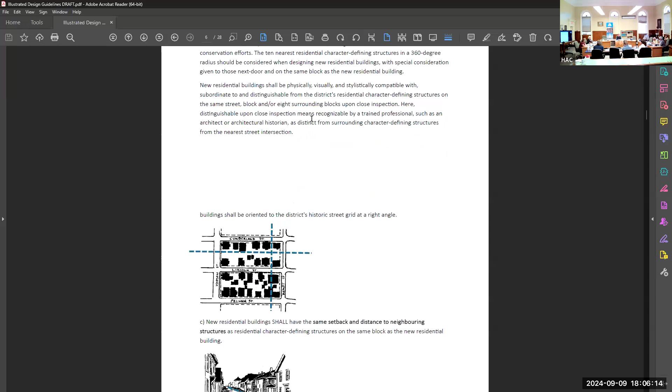Yeah, we can start there, I guess. On page 3, and I know we're talking about the illustrations, but I've used the former guide, the one that Bill Plaskett did, a fair bit. And so some things keep coming up.

So on page 3 in the second paragraph, it talks about architects. But we are not saying that you have to have an architect. It looks like we're saying that, and I know we're advising that, but we're not saying it. I've been asked that question before - do I have to have an architect? But we're not saying that.

Yeah, definitely not. And I think maybe this isn't my place to answer this question because my task was simply to illustrate the design guidelines. So this is actually pulled directly from the draft design guidelines. I can definitely look into that for clarification in terms of future amendments, but really focusing on the illustrations and not altering them.

Okay, I just thought if we are looking at this as a guideline, especially if you're using it for the workshop, for the town, it's a chance to have a go at some of that. It's a little confusing for people. I don't have a lot for wording, but that was one of them. Thank you.

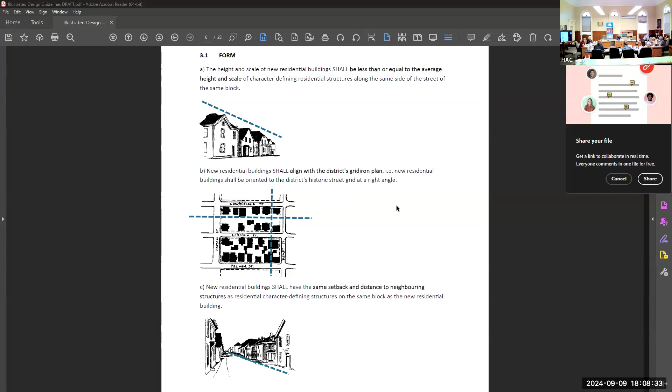I think we can jump into one of the three subsections, which is new residential buildings. On the page you were just on, Trevor, looking at the first three illustrations, we can just roll through, and if anyone has any feedback in terms of the clarity of the illustrations, the consistency through the document, and the third one being the ease of application.

Thank you. I think on that page, I found the illustration for part C, 3.1C, to be a very busy image and a bit small. The other two illustrations are simpler and the lines are more clear, but in that particular one, I think maybe making it a bit larger might make it easier to perceive.

The problem with that illustration is that the setback isn't the same - on the right-hand side of the road, the setbacks aren't all the same. Is that meant to be that we're saying it's not the same, but it ought to be the same? Basically, I think most of these pictures are lovely, but it's so busy that it's rather confusing. I think it should be possible to illustrate that one more clearly.

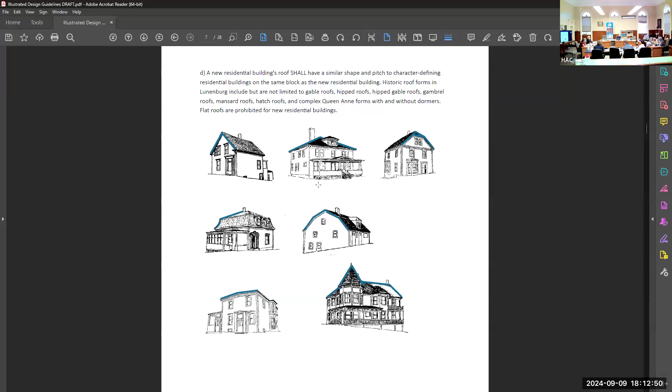I thought, since explaining roofs to a lot of people, and you have them listed there, that's all fine. But I wondered if you could take each one, like a gable end roof, and write it underneath so people could see what it actually is. For a lot of people, these documents are quite educational - they learn about their own houses when they look at it and say, oh, that's what I've got. There's enough room on the page that if they were spaced a bit, they could have that same labeling put in.

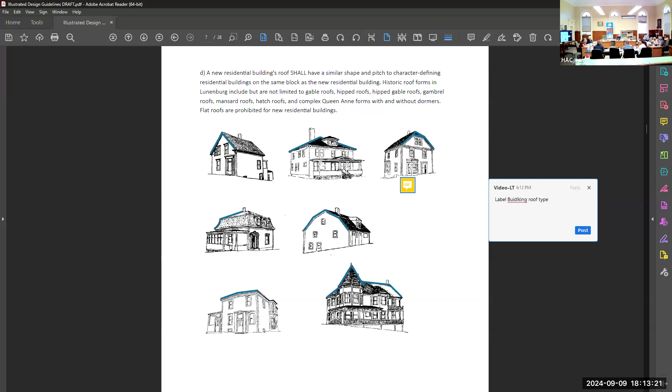Yeah, that's a great comment. Actually, Mark and I were just talking about that earlier today. I think that's a good addition, labeling under some of these images. Thank you. The same might be true for the next one - the dormers too. Perfect, if they could have the same.

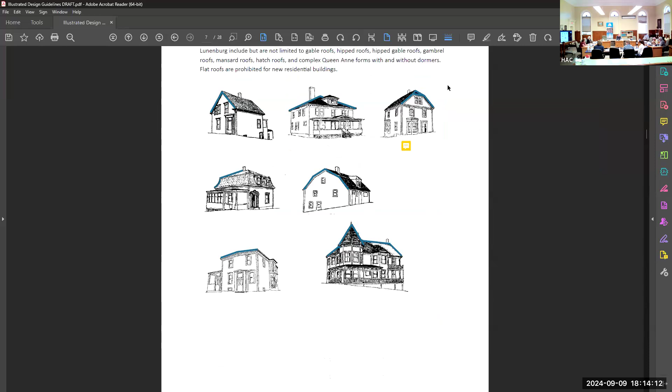I would suggest that of those roofs, the lower two do not add significantly to the point. The one on the left at the bottom, you can barely see the roof at all, and it's so nearly flat I don't think we want to encourage anybody to think that's the thing to do. The one on the right is an absolutely wonderful picture, but who on earth is going to build a building like that again? And I'm not sure that the added bit, the roof on the right of the picture that doesn't appear to have been shingled at all, isn't tying in with the rest of the roof, which is one of the things we're telling people they've got to do.

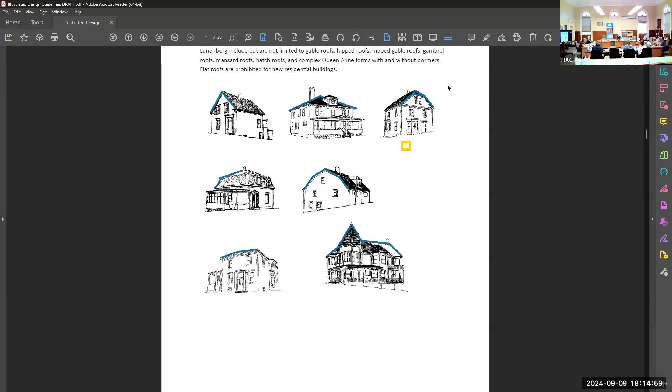So I would get rid of those two, and then you'll have space to put the extra information that Fawn wants. Thank you, Oliver, yeah I think that's valid, we could definitely discuss that. I think I included the hatch roof because there are a few examples of it, but maybe the less popular ones, like the Queen Anne, might not be worth incorporating. But yeah, definitely worth thinking on.

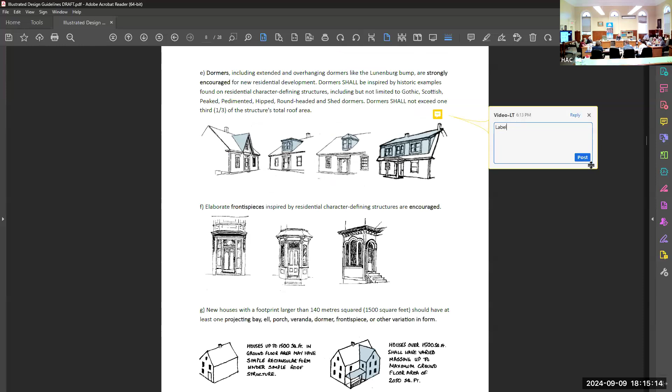Okay, with that, moving forward to this page with the dormers and the frontispieces. And I guess also starting to look at this image at the bottom where we've included a second massing.

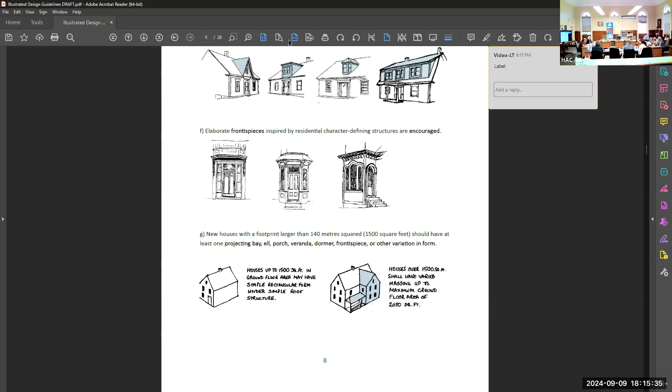Just to clarify, for the dormers in the top right-hand corner, is that a permissible dormer? It seems to be more than a third of the roof. That's a great question. I think what I'd take away from that - I know some of the images have little writing underneath that says yes or no - kind of to what Fawn was talking about in terms of labeling. It might be worthwhile having that for this. That's not a permissible one, is it?

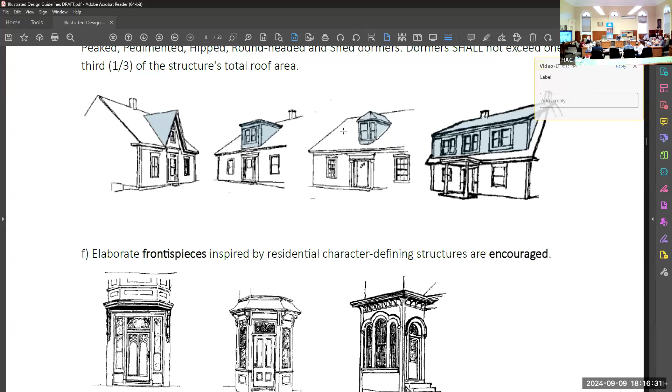Shed dormers, I think, are by and large rather ugly things, even if very practical. But there is somewhere we prohibit having bigger windows above, wider windows above narrower windows, so it's actually a bad idea to show an illustration that does what we don't allow. Okay, so maybe this illustration isn't the best example of showing a shed dormer. I think you can find slightly more modest shed dormers that would show the point. Super, okay, thank you, Oliver.

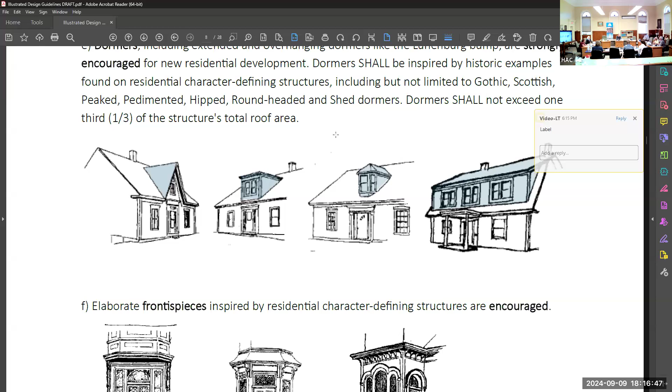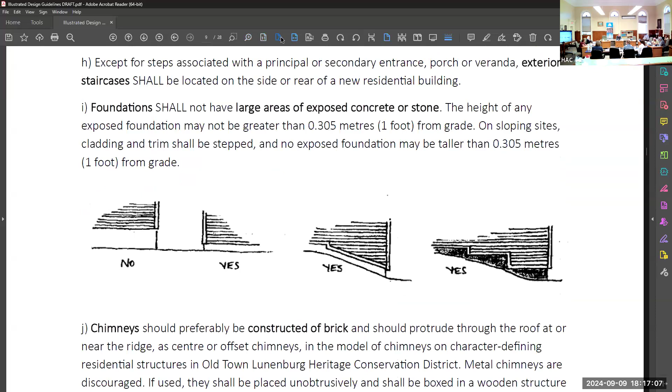Okay, moving on to the next page. I noticed there are two points on this page that have images and one that doesn't, which maybe people find totally acceptable. Anyways, that's something we can talk about - if you think we should be adding images for everything for better comprehension, or if anyone has anything to discuss about these images.

Nothing like a good visual, I always say. But for the chimneys, I was wondering, again since there's room on the page, they're very, very small.

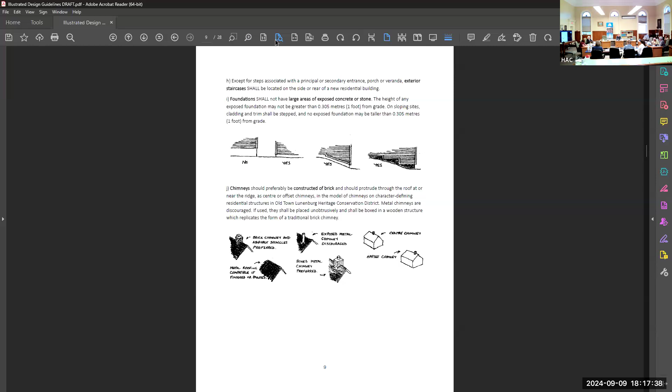Yes, can you figure it out? I'm looking at it on a small iPad, but I wondered if it could get stretched out a little bit.

Or just to keep it separated out somewhat - it's just a little crunched.

I know you also have a bit of scale, like architecture does to these things. I don't mean to mess with that, but those seem a little smaller than a lot of the rest. And chimneys are another thing that are hard for people to totally understand.

Definitely, I think that's easy to do, to increase the scale, especially because this one has a lot of wording in the handwritten portion. So that's great feedback to know that it's not quite legible - just having it a little bit bigger would be helpful.

I might comment, I think it's almost impossible structurally to build a brick chimney at the point on a roof that's shown, because you've got to have something strong enough underneath it.

And you can do that either where you've got an internal wall, or where you've got an external wall, but this looks to be about 3.5 to 4 feet in from your exterior wall.

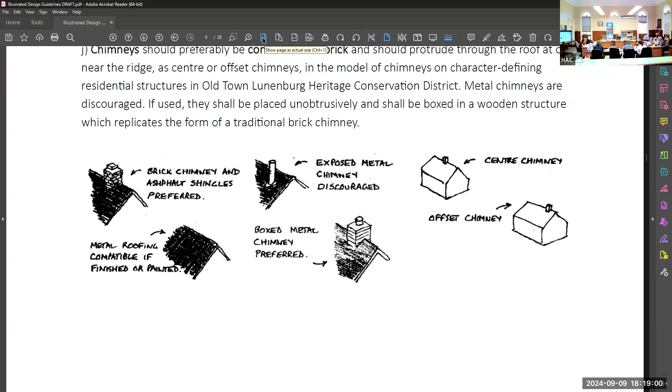So I don't think you'd normally have managed to have a brick chimney right there, because it needs to be supported by a lot of brickwork. Nobody's going to build walls 4 feet thick anymore.

In the Middle Ages, they might have had a big brick chimney there. But I agree with the basic concept, though I have to admit that a chimney in my own house looks much more like the boxed metal chimney preferred.

Because yes, it was going to be impossible to have brick all the way up from the ground.

Do you have - yes, I was just curious why there's a metal roofing image in with the chimneys. So the bylaw reads that metal chimney, or sorry, I'm just finding myself.

Metal roofing. So we can definitely remove that, because it's talking about the roofing materials rather than chimneys, and that's a good pickup that it might make it confusing for some people.

Okay, thank you. The foundation is above - really shows. That's great.

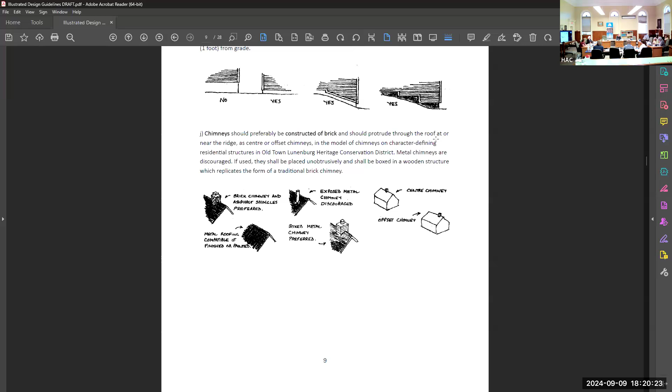All right, so with that, the next section is on principal facade design, so I would love to hear your feedback on this page.

It's on the map, but it's omitted from the list. I should have noticed this at an earlier stage, but I didn't. It needs to be on the list. I have a particular connection with the house - my wife grew up in it.

Does anyone else have anything to add when it comes to the balancing of the facade, the main entrance? Or I guess we can also look at the following page because it's also talking about facade design.

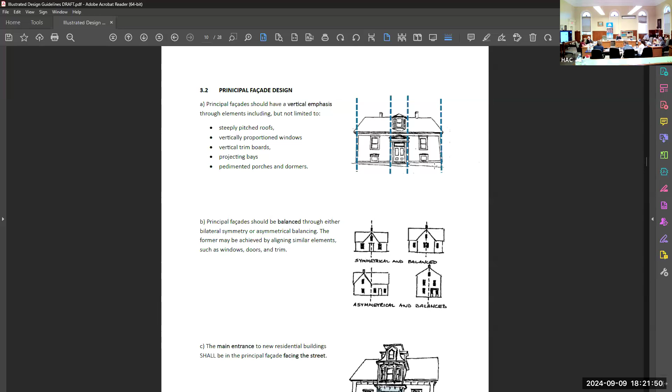Looking at frontispieces and the alignment of dormers and windows.

On page 10, where it talks about symmetry, it says it should be balanced through either bilateral symmetry or asymmetrical balancing. I get the asymmetrical balancing part, and it's tagged there.

Bilateral symmetry is not - and I'm not sure that I even know what bilateral symmetry is. Is it just a synonym for asymmetrical balancing with the 'or' word, or is it one or the other?

I can definitely look into this for you, Fawn. This is also just reiterating to me that we do want this to be a tool for homeowners.

I think it's important to include what's actually being pulled from the bylaw, just for covering what is in there for legal sake, but it would also be helpful to have plain English, as this is a tool.

So yeah, that's right - or another diagram that shows what bilateral symmetry is. I do think that the bilateral symmetry in the diagram is the symmetrical side of things.

I think it might, but you're right for the clarity of the phrasing - just for consistency across both the illustrations and the text. Yeah, for sure, that makes sense.

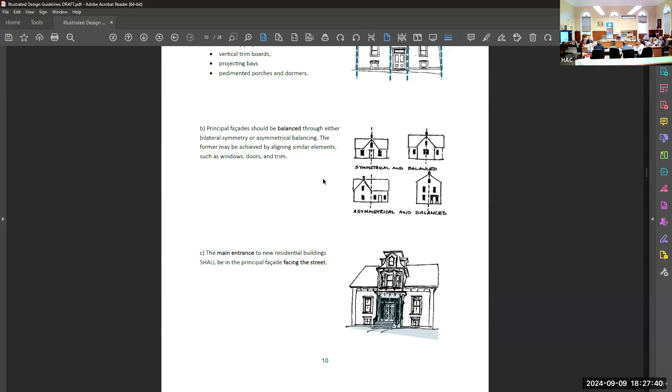Yeah, okay, I feel like that conversation could go on—in the end, that's what this committee's for. Anyways, I'd like to keep the ball rolling and see if anyone had anything to say regarding frontispieces or the alignment of dormers.

Yeah. I'm thinking, for perspective, for the frontispieces, maybe showing one on a house just to show where this belongs, in case people are having a hard time understanding that they're not just little sheds with those shapes. I don't know, just a thought on that one.

I like that. So just including an image beforehand, and then maybe having these on the side as the frontispieces. Okay, that's great. Thanks, Natalie.

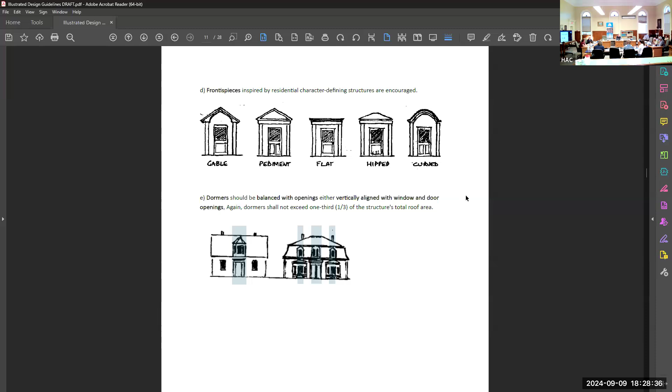All right, so page 12 looks at windows and doors. Does anyone have any notes about the illustrations for windows?

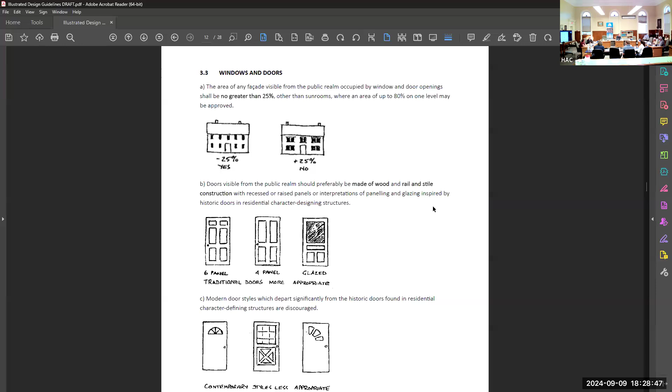I guess, yeah, we can start with windows. Doors.

Okay, we'll keep rolling to page 14. So looking at trim, oh, sorry.

I was wondering about this one below, where there's G, H, and I. If I go back to F, that's next to two illustrations. Then when you come to G, H, and I, the pictures are down where we're talking about skylights, whereas I think those go with H. But there really should be drawings for G and H, so I'm not sure how you'd do that without messing up the format. The pictures aren't beside the correct item.

Definitely, so just massaging around the formatting for this to make it a little clearer, kind of more like page 12, where it's pretty simple - we've got a point and then a drawing right underneath it, so it's very clear which drawing is associated with which. Okay, definitely, that's good.

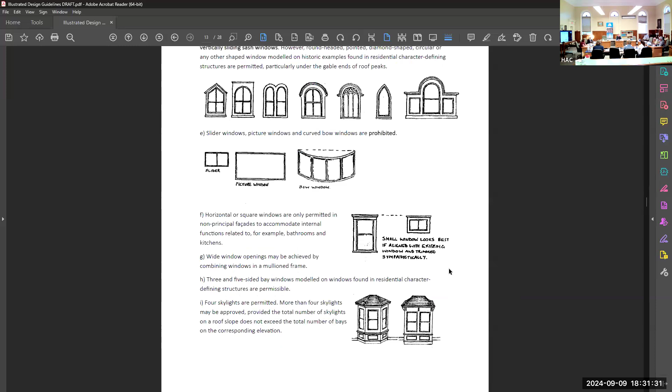Or if you feel you don't need illustrations for certain points that aren't illustrated, what's the general feeling? I think illustrations overall would be best - visual is always a great resource when all else fails. Thank you, that's great.

I was going to say, I think it's important because you're introducing words that aren't common, like mullioned - most people don't know what that word means. So a mullion frame is even more difficult. They wouldn't necessarily know the bay window goes with that picture, except that it's beside the skylights. But yeah, especially when there's uncommon lingo used, it's good to have illustrations.

I can definitely look into either adding more Plaskett drawings, or maybe look at adding some photographs or renderings, things like that - just simple renderings. Okay, that's good feedback, thank you.

I think it's good that you've got the little drawing of the bow window, because many people won't understand the difference between bow window and bay window. Given that one is encouraged and the other is forbidden, it's quite important that people know the difference. Super, thank you Oliver, that's great.

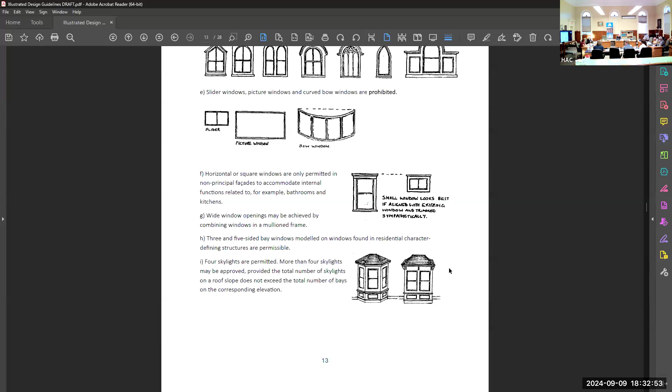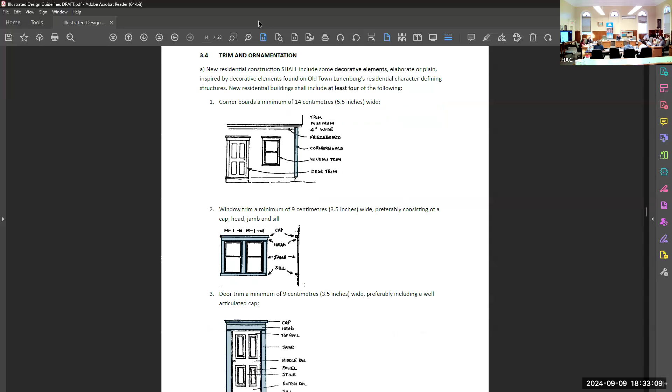Okay, how's everyone feeling about windows? Okay, so the next section is a bit heavier. Basically, this section is looking at prescribing people to include at least 4 of the following elements. So if anyone has notes on these, go ahead and open up the floor.

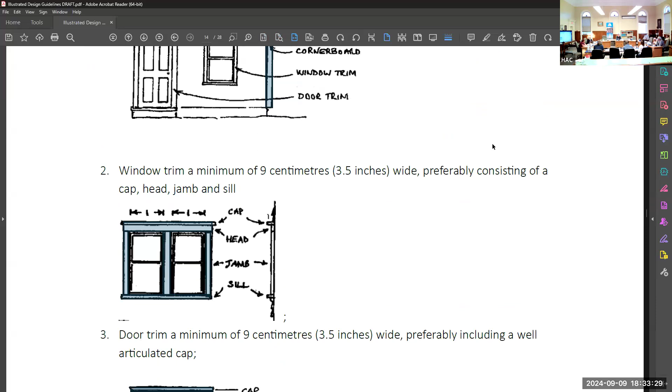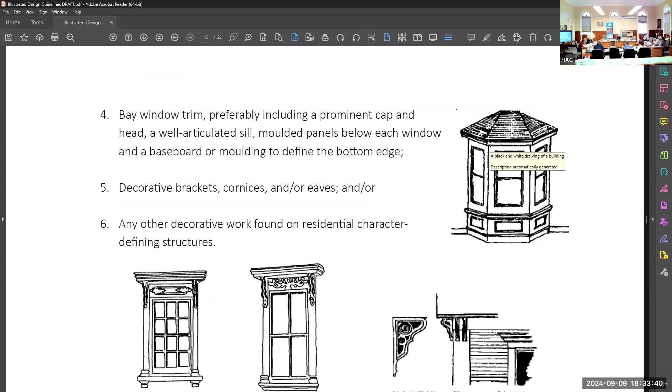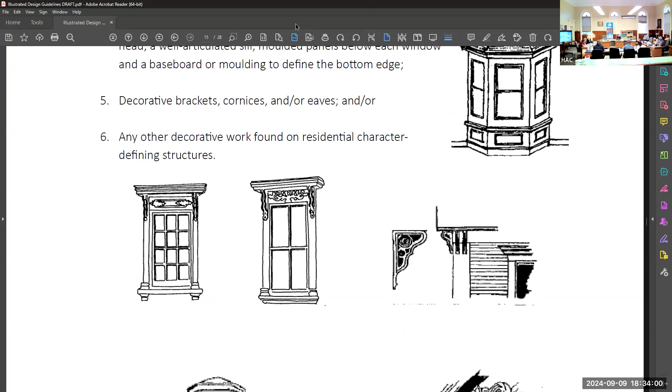I guess for clarity - I'm on the next page now, sorry, I don't have anything for page 14, but I'm thinking with number 5, decorative brackets, cornices, and/or eaves, and/or - I'm just noticing that now. And just to clarify, it's at least 4 of the following, and that's all the way down to 8.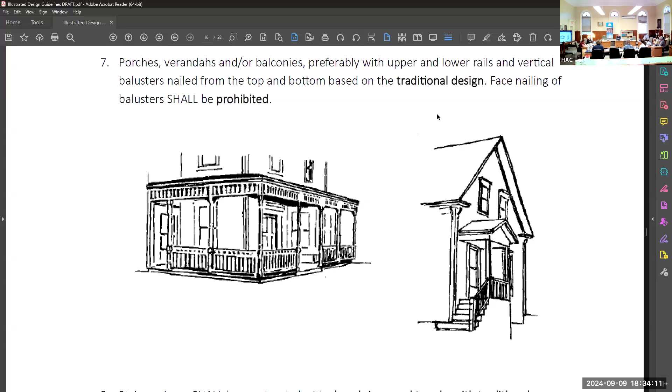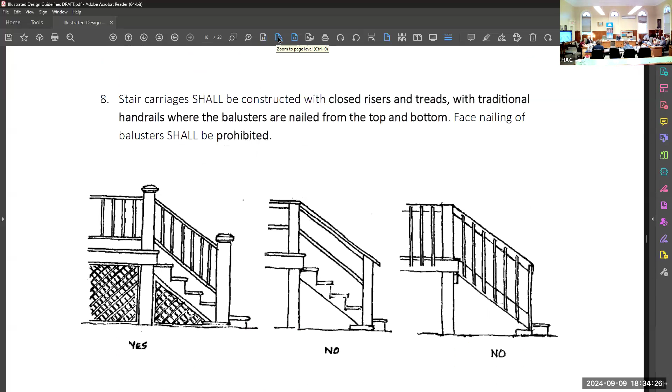I think sketches would help clarify some of the language, and then some labeling. I guess there's already some between that and some labeling with the sketches. That would be good - yeah, that's great. And I was thinking about this this afternoon.

This number 8 is kind of heavy on the illustrations, so labeling, I think, would be very helpful in this instance. Thanks, Natalie.

Number 2, with the window trim - I'm not quite sure of the purpose, other than how architects draw things, of the arrows above the window without any explanation. Not sure what those do. Yep, we can take those out.

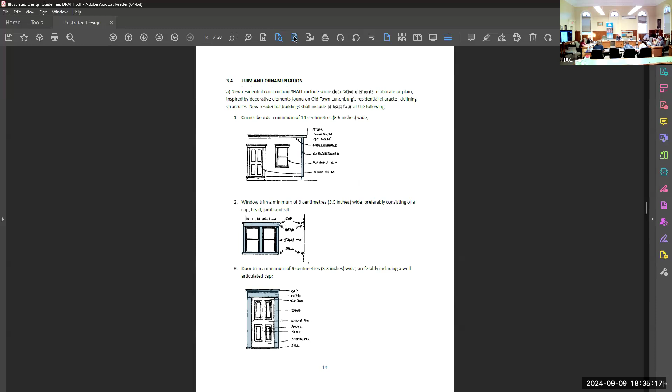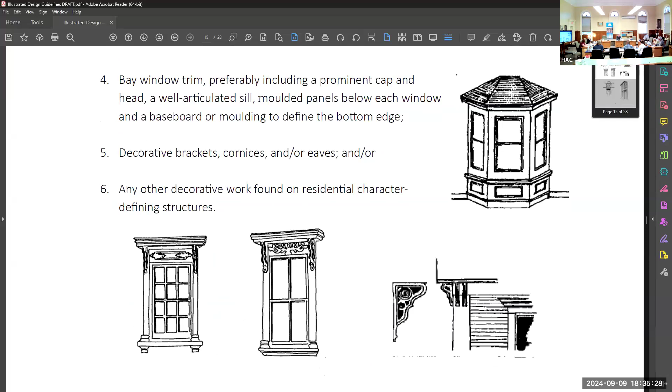Okay, no problem. And on page 15, I had a note to maybe combine number 5 and 6, and then indicate underneath the drawings what they are. And one thing I found missing - it's just one word, but I'm putting in a little plug for the word 'corbel.' It is a bracket, but I looked up the difference between a corbel and a bracket, and the only difference really is that a corbel is thicker than a bracket. However, you hear that word a lot.

People keep asking what these things are anyway. They're kind of different from a bracket, even though they have a bit of structural integrity. I thought, oh no, you can't combine them. But anyway, it would help if some of them were labeled, like a cornice versus a bracket versus a corbel, elements of trim, because we in Lunenburg have a lot of unique kinds of trim.

Yeah, I think that's a great idea, also because this is a tool for homeowners, that's who it's targeted at. So in terms of understanding more about your home and what makes up the facade, I think that's terrific towards the understanding of it. Super.

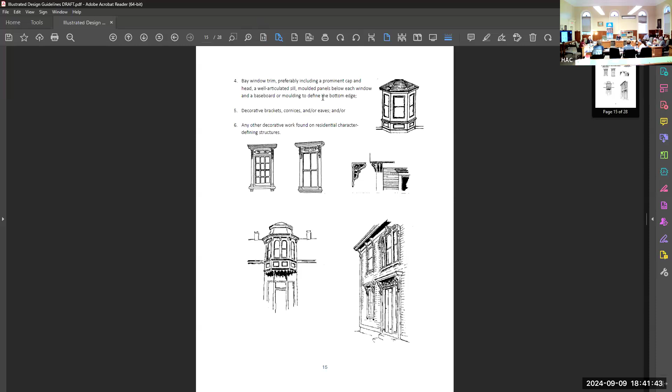Okay, I think from there I might roll into materials if everyone feels okay with that. All right, so page 17.

This one has less illustrations, but I'm going to point out off the bat that we had already discussed maybe establishing illustrations for all of the points, which would be appreciated. But if someone wants to tell me otherwise, go for it.

Yes, and actually I missed it on the top one, but it's in this one, and it's just a small one - a lot of people in modern day don't know what a baluster and a balustrade is. That's actually a bit of a thing when you're doing it. And I know here it says it shall be wooden.

If you look at some photographs of some of the homes here in town in the past, there are some that had, and I think some still do - like a cast iron, not wrought iron, they were white metal I think. That was fairly common for trims around like a top of a sunroom, or they'd use the baluster to make a balustrade around an upper deck or a widow's walk or something like that.

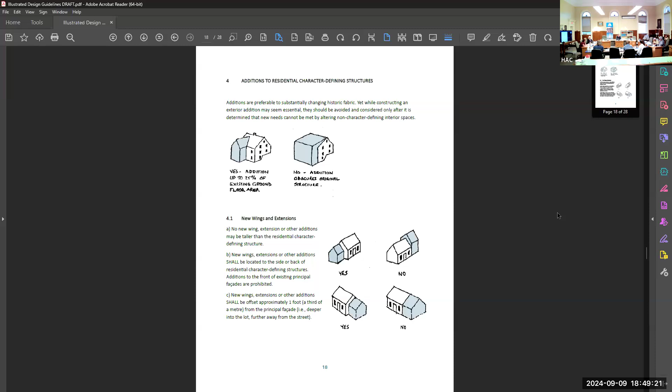All right, I'm just going through to page 20, 21. These are a bit text heavy in my opinion, but I'd like to hear from you and what you think. It's not in context of the text, there's a lot. I think it would be hard to put details in all of those, but on page 20, at the bottom, again on the dormers...

My understanding of reading it and looking at the sketches is that the top two are permitted and the bottom two would not be, but I could be wrong on that. Making it clear what's a yay and what's a nay is important, because that is not clear at all in those ones. Even perhaps an X next to the non-permitted ones would speak volumes more, because if someone's just flipping through and seeing a picture there, they might think, oh, I can do that.

Yes, that's a good point. The one on the bottom right-hand corner really shouldn't be permitted. We might just about allow the one beside it. That's great feedback in terms of clarification for the illustrations. In terms of the illustrations on the following page, is that good?

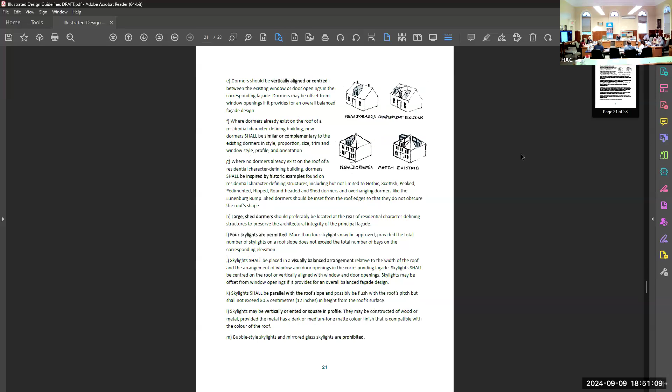Good stuff. Okay, looking at the two following pages, 22 and 23, in terms of new doors and windows, does anyone have any feedback? Yeah, let's see what I have here.

At the top there is a yes and no, before and after, and then there's a set of windows with shutters, which go with— was it G? Yes, it's G. So again, it's hard — when you first look at that, you think, what are they trying to really say? It looked like one of those games of what's missing in the picture, like there's one shutter missing on one. So is it that the addition of shutters without historical evidence of their prior existence is prohibited? Is that what goes with that? Or am I wrong? What does that go with, that collection of four?

Yeah, that's correct, Fauna. I think this is speaking to the same point you brought up earlier. Some of the pages are formatted with the associated drawings directly underneath, and that seems to be the right way to go, just in terms of clarity and better understanding for people. So I can definitely adjust the layout to make it more digestible.

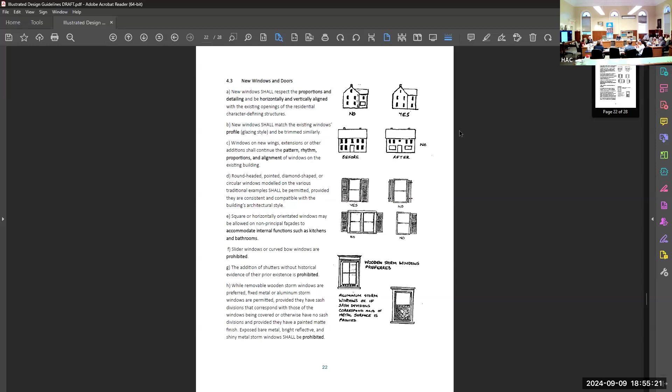But this section, if you flip back, is on additions. So we're really talking about - picture it, you've got your house and now you've built your addition, maybe on the side of your building. You're assuming your house has a primary entrance. So basically what we're saying here is new doors, a secondary door - that door we don't want to be visible from the public. So for example, putting it maybe on the side would be a better and more encouraged option.

But again, this is permissive language, it's 'should', so we can encourage it from a heritage standpoint, but we can't prescribe it. So if you wanted to put your door on the front, you could, but it would be encouraged not to. That's really just, from my understanding, from a heritage standpoint, to keep the primary focus on the primary entrance. So it's really about new secondary doors - that's right, yes, is how it should be.

Right, so there is a thing about the secondary door confusion with new doors versus - because then on number K, new doors shall be. So again, we replaced our door when we were on Lincoln Street with a new door, but it was the principal primary entrance at the front. So when I think of a new door, I think it was brand new to us, you know? So just that separation of what is actually a new door, literally a new door that you purchase, versus a new addition to the house.

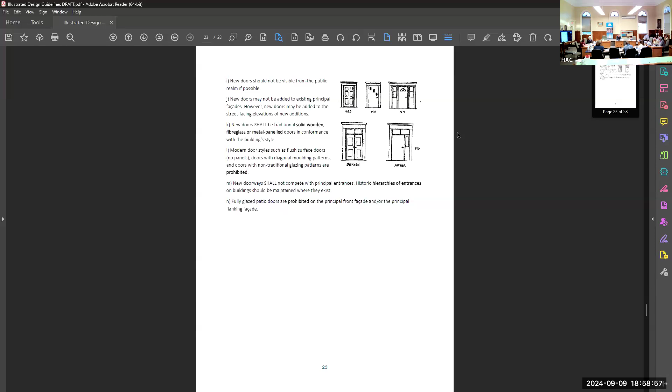I've got a little bit of a question about the pictures. First of all, I'm not sure what the words 'before' and 'after' add to this pair below. I see what you mean, but you're saying if you want to replace your nice Victorian double doors, don't do it with that on the right. But I've also got a question about the picture on the right of the upper row.

You are obviously saying no to the door, but unfortunately it seems you're rather implying that side lights are also unacceptable, which I don't think you're wishing to imply, because there are plenty of good examples of that being quite acceptable. So maybe just clarification on what this image is illustrating, and the style of door - it comes across as saying don't put sidelights.

Then definitely we can just clarify. And I think that comes down to labeling again, and clarifying on that.

I feel like these images belong to what are acceptable replacement doors rather than new doors for entry - new doors for new entryways. Because you're seeing this is what it used to look like and this is what it looks like now, and we like this, but we didn't like that.

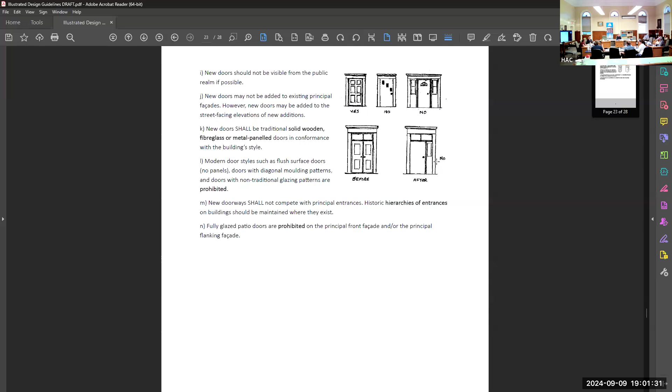I guess I'm a little confused, and I just wanted to clarify that this is for new residential infill. This is what we're looking at. We're not talking about renovations to existing houses. We're not talking about modifying existing buildings. And so I think there's a number of things in here that if we went through in detail would be completely omitted. The before sections of all of these things don't really make sense for a new building that's being proposed, unless I'm mistaken.

So when we see a lot of these diagrams that are super confusing to the public and people who are going to be trying to apply to build something new, to see a before and after, and there is no before, right? So I think we have to sort of refer them back to what the items are that we're looking to try to achieve and try to make it less confusing, if that makes sense.

Actually, I think we're doing both, aren't we? Isn't that the whole point? That we're both giving advice about alterations, stroke maintenance kind of thing to existing buildings, and guidelines for new, and that's part of what's difficult - it's one collection of instructions and pictures for a number of different situations. But I still think that's a fair thing to do.

But I would entirely agree that before and after are unfortunate words to include, because in most cases there won't be a before. But the same principle applies - if you're needing to replace your rotten Victorian door, you've got to still replace it with the right kind of style, and not have a door which might be fine out in Newtown, but won't be any good in Old Town. Right, thank you, perfect, Oliver.

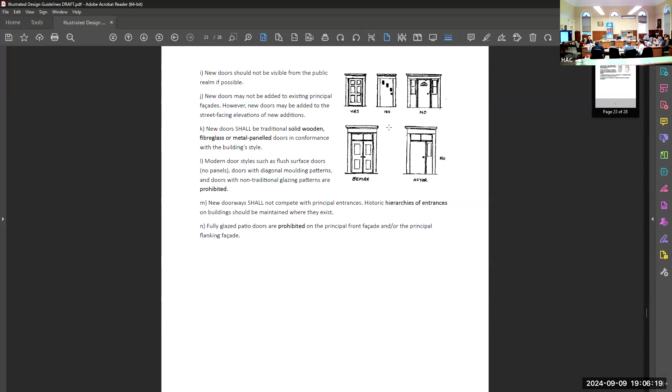With that being said, there is one last point before we get into alterations, and that's new decks, porches, verandas, balconies, ramps, and stairs on page 24. If no one has anything to say, then we can jump into alterations.

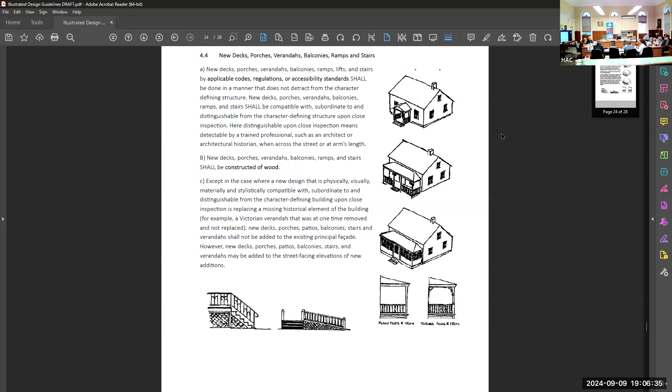Yeah, Trevor, if you want to scroll down to page 26. So this is the small, but again, to Fawn's point about it all being infill, all of this ties back to infill, contributing to housing, whether that's a new project, a new development, an addition to your building, or an alteration you're making to your house to increase housing. So I'd love to open up the floor again to look at the illustrations for alterations.

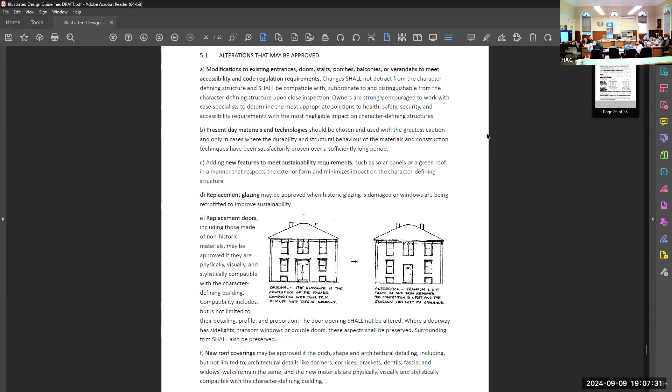I'm not quite sure what kind of image you would use to help explain on page 27. I'm not quite sure how, so alterations prohibited, this would be to existing.

Illustration letter A, where no attempt should be made to correct deflections that have occurred over time. I know what I might define deflections as, but I'm not quite sure what they mean there or how you would show it. Changes over time should be appreciated and understood as essential aspects of vernacular architecture. Extensive restoration is prohibited. By restoration, it's almost like renovation more, but can you explain sort of both of those? I don't even know if you can put a drawing to explain them.

Yeah, I think definitely both of those I would tie back into the standards and guidelines in terms of being distinguishable. You don't essentially want to alter things that have been put in place over time that have now become character-defining elements. So I think I would have to do a bit more research and come back to you, Fawn, on those two points, and why those decisions were made to include them in the bylaw.

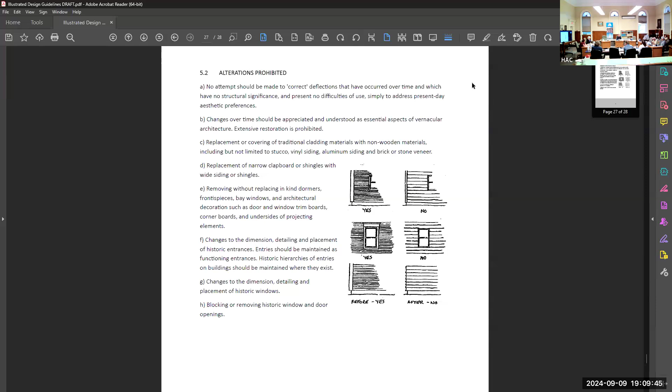On page 26, I'm presuming that the picture on the right is meant to indicate what not to do, but it's not made very clear that that's the purpose of the picture, or at least I hope that's the purpose, because the whole character of the house has been destroyed.

Okay, super. So again, clarity on the illustration in terms of yes or no. We can do that. It directly contravenes the writing that's to the side of it, because it says you must retain the transom and all of that.

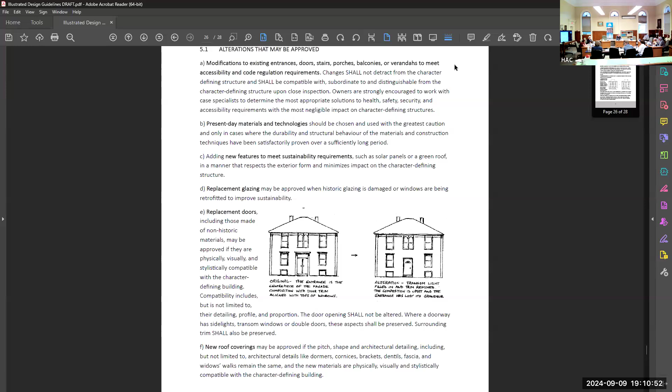No, exactly, you definitely understood the illustration, but it would be good to have those marked clearly. I think it needs the word NO somewhere there, or a big X. Okay, super. Does anyone else have any comments or things to add for these pages? If not, I will roll right over into our last section, which is outbuildings.

Okay, do you have anything? No, okay, I read it. So that's the entire document. I think, yeah, there's a few takeaways.

The main ones being just the layout of the images. It was clear to me that most people liked having them directly under the point we're talking about, just for clarity's sake. So keeping that layout consistent through the whole document would be good. Also adding some clarification wording with or alongside some of these illustrations would be good.

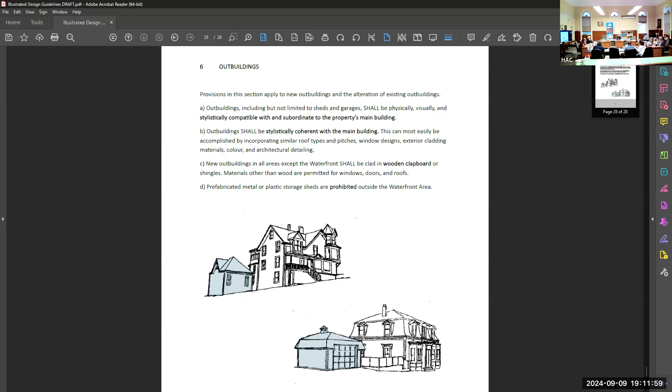Does anyone else have any other big takeaways? No, it doesn't sound like it. I think there were some excellent points brought up tonight, so thank you very much, Dora, for that. Okay, thank you so much for your time. That was a big chunk of time to go through.

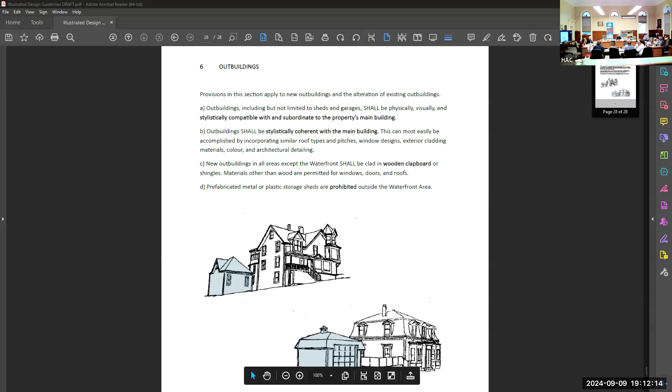Yeah, so I will get back to it. I guess the next piece of information following the design guidelines is that we'd like to have an open house on September the 19th. The real purpose of this open house is to give homeowners and community members the chance to actually get their hands on this document and look at real world examples of alterations, additions, new buildings, and see how people who are coming at it with no experience find it easy to understand, and go from there.

So it's a chance to come in and chat individually rather than a discussion meeting? Yeah, we can definitely chat individually, but it'll kind of be a time for people to familiarize themselves with the document and use it as an exercise to see how easily they can navigate it.